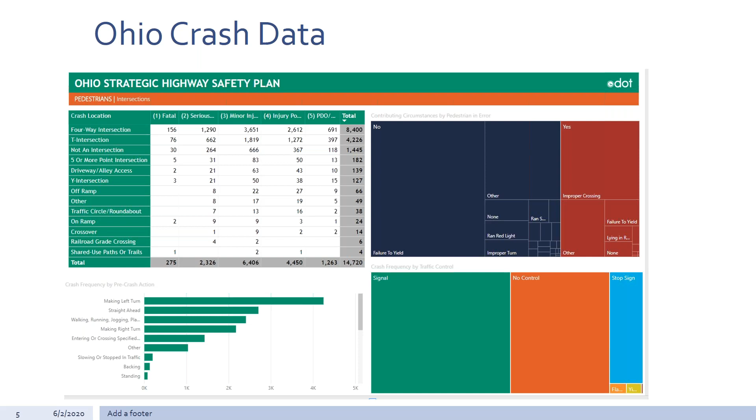You can see the different types of intersections - the traffic circle, the roundabout, as well as all-way stops, traffic signals, and so forth. This is a great way to visualize what is going on in your state as it relates to pedestrian safety and intersections, and what we're doing to improve that. Hopefully looking at proven safety countermeasures and deploying them not only as safety projects, but also as capital improvement projects, state-funded projects, and locally funded projects. I encourage you - I think I heard Victoria talk about opportunities related to the crash form and the importance of the information on crash forms, which helps us make better data-driven decisions about intersections and our roadways overall. This is a new way of looking at the data, at least for me in Ohio, and you guys are always ahead of the curve. I always like to see how Ohio is presenting the data and how you can use this information both for individual projects and for planning for the future in your communities.

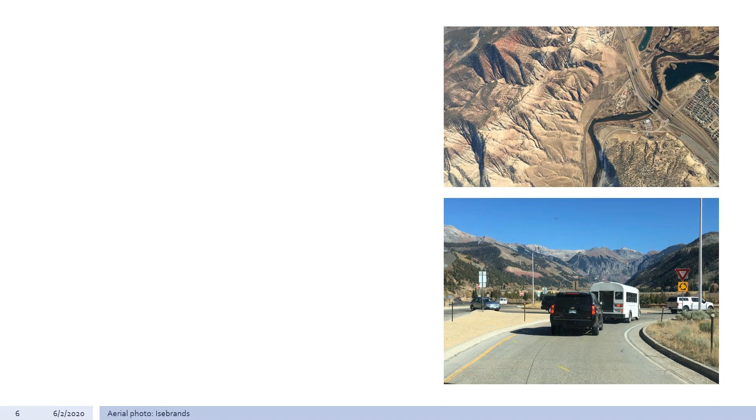I almost always have a few items I like to cover that are facts about roundabouts. It doesn't hurt to see them for the first time, the 10th time, or the 100th time, because it really is motivation for why we look to roundabouts as that solution. So I'm going to go through those - top 5 here.

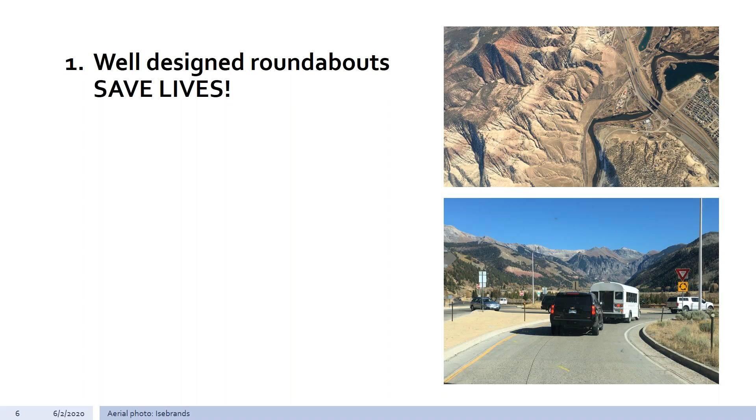Well-designed roundabouts save lives. We know that. The data tells us that in the US, the data tells us that around the world, the data tells us that in our communities. So we know this is an opportunity to improve safety in our communities, reduce fatal crashes, as well as reduce severe injury crashes.

Speeds between 15 and 25 miles per hour keep all users safe. That's kind of the sweet spot - it's a range, sometimes we see lower than 15, sometimes higher than 25. But the importance of what that speed means for all users is really, really important.

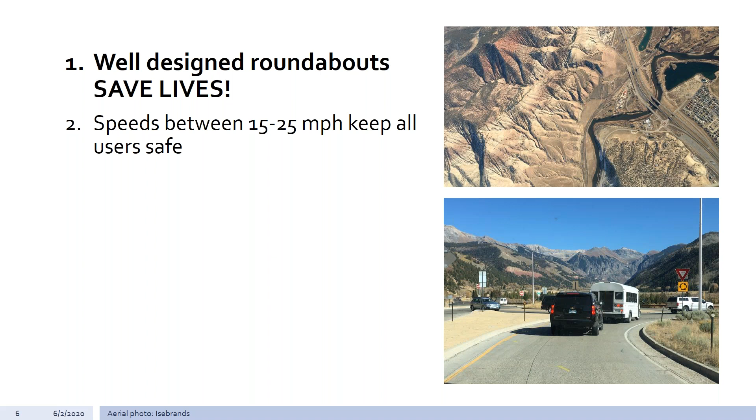One thing I always do when driving through a roundabout - whether it's in my own community or one I've driven for the first time - is check my speeds. I like to see whether it's an R1, R2, R3, R4, or R5. That's our speeds we're checking as we're doing our designs - the entry speed, the exiting speed, the circulating speed, the right turn speed, the left turn speed. Those are really important. I always smile when I'm between that 15 and 25 miles per hour. You can do this even on your commutes safely, checking your speeds as you navigate through roundabouts to see if it is in that sweet spot.

Hillary, I have a quick question for you. Yeah, sure - somebody would like to know if you could briefly explain the difference between a roundabout and a traffic circle. Sure thing, and maybe that came from that previous slide.

Traffic circles tend to be larger - typically anywhere between 300 feet in diameter upwards of 600 or 700 feet in diameter, so they can be very, very large. Traffic circles also don't always have yield on entry, while roundabouts always have yield on entry. If you think of DuPont Circle in the Washington D.C. area, there are actually traffic signals at many of the approaches to those large traffic circles, and sometimes there are parks in the middle of them - again, not a feature of a modern roundabout. Traffic circles also sometimes have larger speeds and weaving areas, which again is not a feature of a modern roundabout. I know in Ohio you have some larger traffic circles that are lower volume but tend to be very, very large, and sometimes there's stop control on entry versus yield control. That's the difference, and that's probably why in that data I just showed, you see both traffic circle and roundabout categorized together in that particular database.

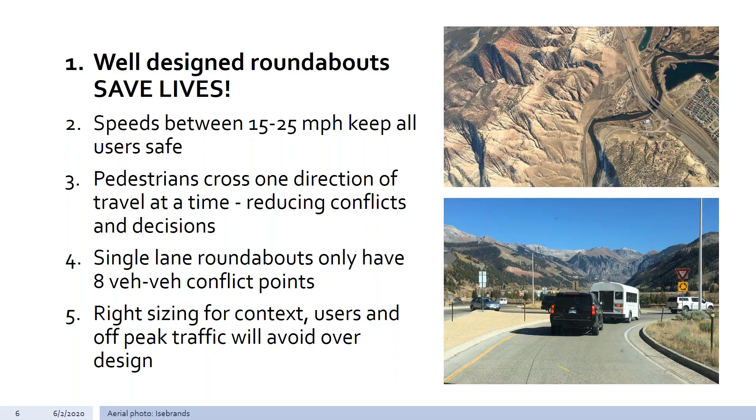So let's dive into roundabout guidance, okay?

Hopefully you are all familiar with NCHRP 672, which is getting outdated. Publication date was 2010, and here we are 10 years later. There have been dozens and dozens of other research projects, as well as updates to other documents in both traffic and design that are enhancing what is in NCHRP 672. I still refer to this document on a regular basis.

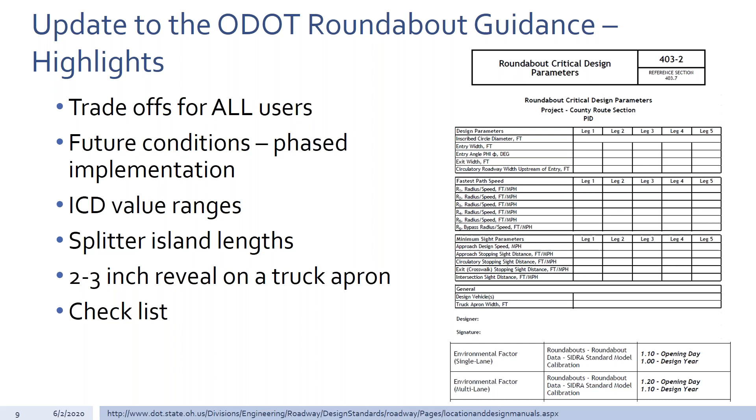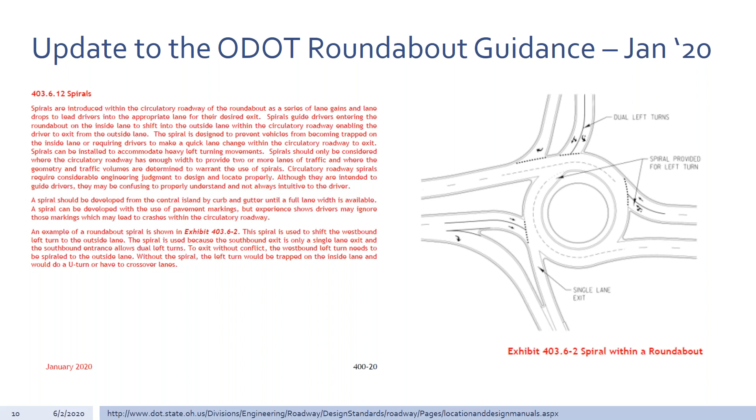So again, I really like the continuous improvement I see in the ODOT guidance. This is one of the states where I regularly check what you all have in the guidance as I work with people not only in Ohio but across the country. I pulled this one out just as an example of a major change that occurred in the roundabout section related to the spirals — you can see the image on the right as well as the text. I don't intend to go into great detail, but this was a major update that occurred in January 2020 of your roundabout guidance. So if you haven't grabbed the most recent document, I encourage you to do so.

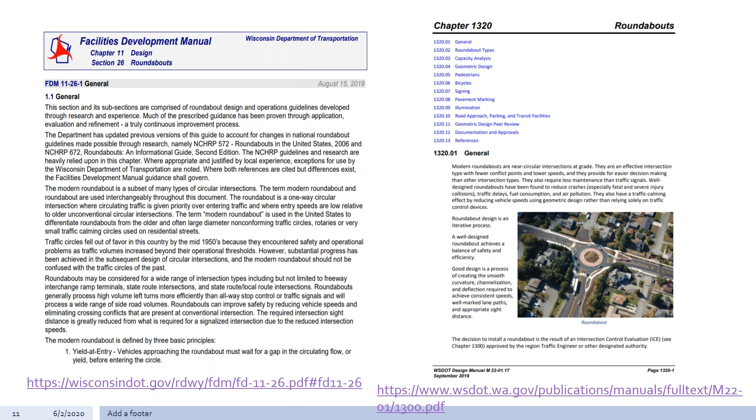This stuff is much more accessible to us these days. Perhaps there's something you're curious about or not quite sure how to design or handle there in Ohio. In addition to NCHRP 672, we have other states and local agencies with great information out there that we can be tracking, and it's very easily accessible. You guys are able to download a copy of this PDF for your use. I always try to put the links to where I'm getting my information so you can go directly back to that and dig in for yourselves. In this case, you've got not only design guidance, but also operational steps and recommendations for these particular states.

Now, I know that Arcadis there in Ohio, Brian Moore in particular, was involved in this project and has been involved in looking at some feasibility studies there in Ohio for particular projects.

To our knowledge, in the US, the first turbo roundabout that will be on the ground, and I haven't confirmed 100% if it is on the ground yet, would be in Jacksonville, Florida. They had a roundabout that's been vetted for quite some time now, and it was supposed to start construction at the end of 2019. I was unable to confirm that prior to our webinar today, so if any of you can confirm that it's completed, I'd love to hear in the chat pod. But again, this is just another variation of the roundabout, with some different benefits in terms of lower speeds, really trying to reduce some of the issues we tend to see on multi-lane roundabouts, with raised features, raised channelization on the approaches and within the circulatory roadway. So stay tuned on this. This has been talked about at your Ohio Roundabout Conference, the concept of a turbo roundabout, and now we have an informational primer here in the United States to help those looking deeper into this option for design.

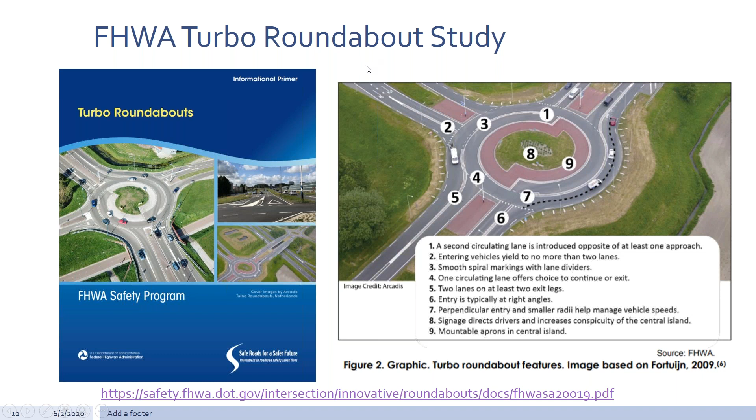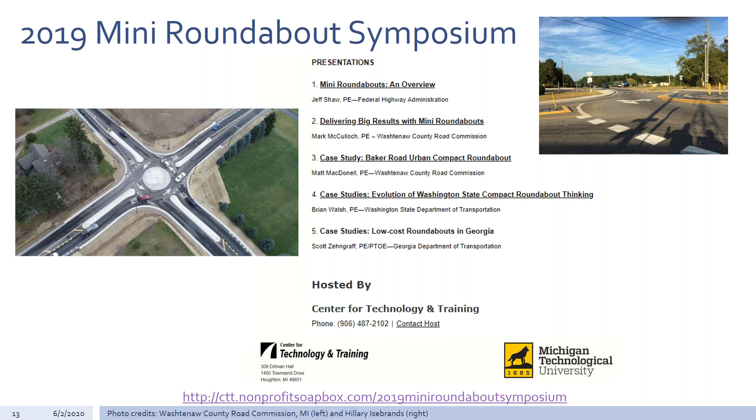So what roundabout projects are you mostly working on? Single lane, hybrid designs, multi-lane, mini roundabouts, a mix of all of them, or none? Just looking for what you're primarily working on, whether from an agency perspective or a designer perspective.

Okay, so right now a majority of you are working on single lane roundabouts, which is great. Single lanes are very common no matter where you are, whether it's a rural environment, suburban environment, or an urban environment. So great to see.

So about 14% of you are saying hybrid design, which would be a combination of 1 and 2 lanes, or 2 and 3 lanes. Not many working on multi-lane roundabouts, 2x2s. A few of you working on minis.

Again, you've got some great examples actually in the state of Ohio of mini roundabouts. We saw those in Newark last fall at the Roundabout Conference. And then of course, there's a significant number of you working on a combination of those, which I would expect for agencies or consultants working on multiple projects.

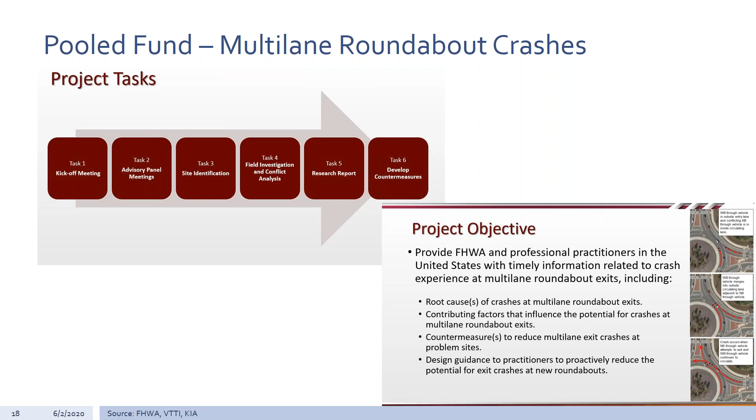Great, thank you, Hillary. Victoria, can everybody hear me? Yes, they can all hear you. Great, thank you. So thanks, Hillary, it's always good to hear everything that you have to say.

I just want to touch on a few things that we have going on here in Hilliard that might be of interest to the other folks in the state of Ohio. As Hillary mentioned, we're part of the pooled funds study. City of Hilliard was a contributor to that. We really wanted to be at the table to try to come up with some solutions to the 2x2 crash problem - if any of you have heard me speak at OTEC or anything like that, you know I'm pretty passionate about trying to come up with some solutions there.

The timing of this was actually really good because the data collection started in 2019, and we made some significant changes to our 2x2 roundabout in the summer of 2019. So the FHWA team was able to collect some data beforehand, both drone video data and counts, and could really see what was going on.

Last summer, we made some changes to signing and pavement marking to really clarify and simplify using overhead lane control signs, got rid of fish hooks, changed some key markings in the circulatory roadway, and some additional modified signage in our central islands. And so far, knock on wood, we've been pretty pleased with the results.

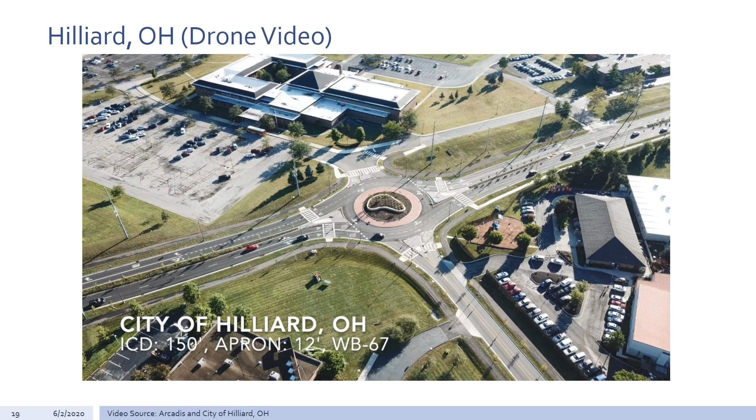You'll see here a multi-lane roundabout on the main line, single lane roundabout on the cross streets, ICD of 150 feet, 12-foot truck apron. Here we're going to see a through movement on the inside lane, and the truck's coming in, and you can see he overtracks just a little bit into the outside entry lane, uses a little bit of the truck apron, and then exits through there.

So he's using a little bit of a truck apron, and we're also going to see a through movement the other direction, but this time in the outside lane. As the truck comes through, you're going to see it track a little bit on the inside lane. The driver on the inside lane holds back. And not once did the truck ever go up on any of the curbs here, with the exception of the truck apron.

And especially here on a right turn. Again, this is WB67 going through 150 foot ICD on the multi-lane portion of this roundabout. So you can see them making the right turn here.

This is going to go by really quick, but you'll see that this is an auto turn simulation of a WB67, and it showed the truck tracking into the central island, making that left turn. And here's the actual truck. You can see the truck is only using a portion of the truck apron. So I thought that was just a really interesting observation, that auto turn showed it going into the central island. Here's this same truck doing a U-turn around the roundabout, and again, not going into the central island, even though auto turn truck turns showed that was going to happen.

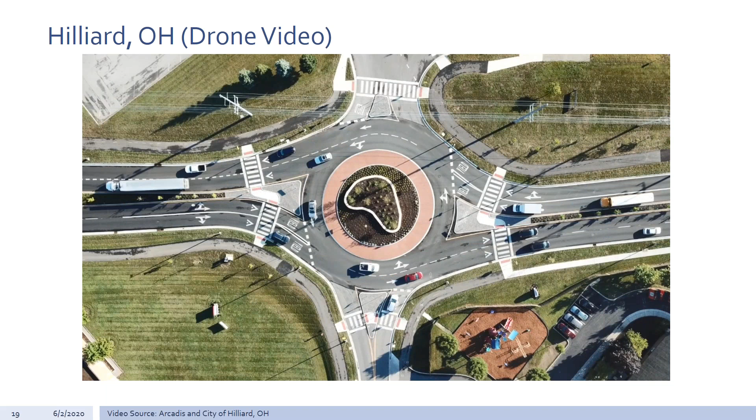So now we're going to move to another intersection here. This is a single lane that was designed more in a residential area, 120-foot ICD, a 6-foot apron, and the design vehicle here was actually a WB40. Again, this is the same truck, we've been using the WB67.

Making the right turn, and again did not go up onto the curbs. Here he is making the left turn.

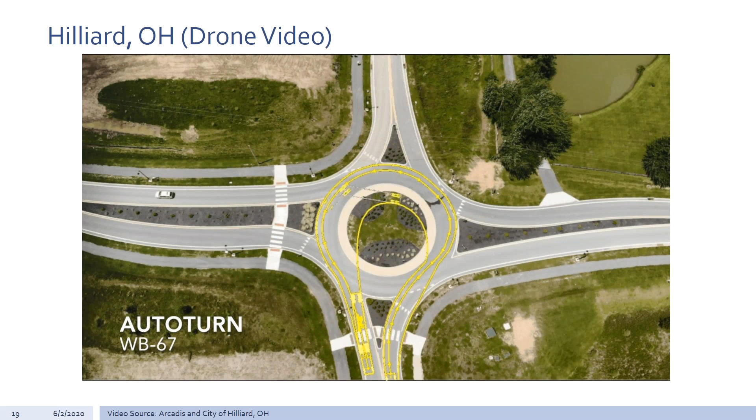You'll see that he does use the truck apron, uses the majority of it, but like the other cases, does not get up on the curb, stays in the truck apron. Then here's auto turn showing what a U-turn would look like, well into the central island. And here's our truck that's going to make that same U-turn movement, just pay attention to how he's using that truck apron. He'll be using the majority of it, but not getting into the central island.

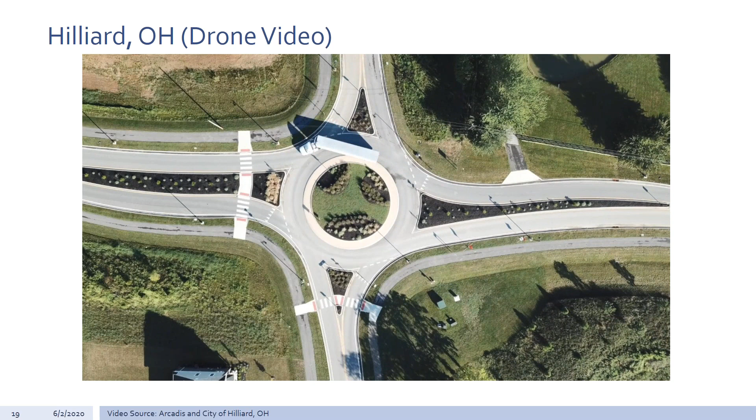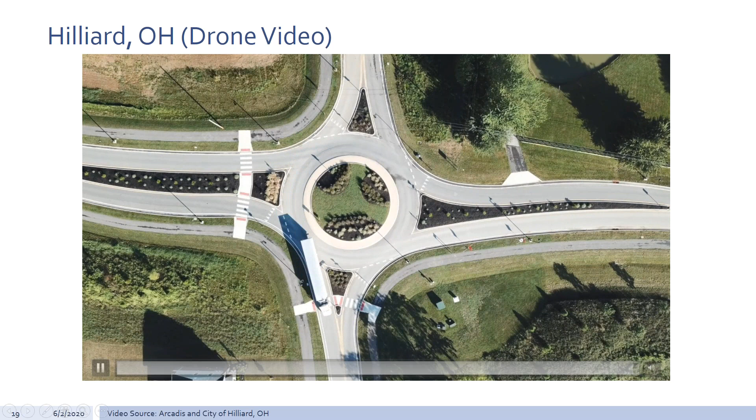So these were really just some observations that we made last summer. Just thought it was really interesting. We're designing these roundabouts and really being dictated by the design vehicle, using the tool of auto turn. I think it would be nice to see some additional research on this and some other locations and how those are tracking. I first noticed this a few years ago, just driving in the winter months, noticing there were no truck tires up on the truck aprons. So I kind of pay attention to that on a regular basis, and I notice these trucks just don't seem to be using the truck aprons like we thought they would. So that's all I have there. Letty, did you have anything else to add?

No, I don't think so. I think our gut reaction is, when we run these auto turn templates, if we had seen that much over tracking, especially off the truck apron, we would have immediately decided to make the roundabout larger. I guess I would say we should be questioning some of these assumptions, and maybe as a balancing act, you keep the roundabout smaller but increase the truck apron instead. So I would challenge all of us to really think about assumptions and not use a cookie cutter approach when designing the roundabout.

So that's all I had. I saw there was a question about the speed of the truck. That's something we didn't measure when we were out there, but if I had to guess, Letty, were you thinking maybe 10 miles an hour, or a little less? I would say 10. The truck driver was going pretty slowly. I'd have to say this truck driver was pretty skilled and experienced, and we all know not all truck drivers are that good. But I was impressed that even on the smaller roundabout, where the design vehicle was a WB40, he didn't even touch any of the curbs. That was pretty impressive.

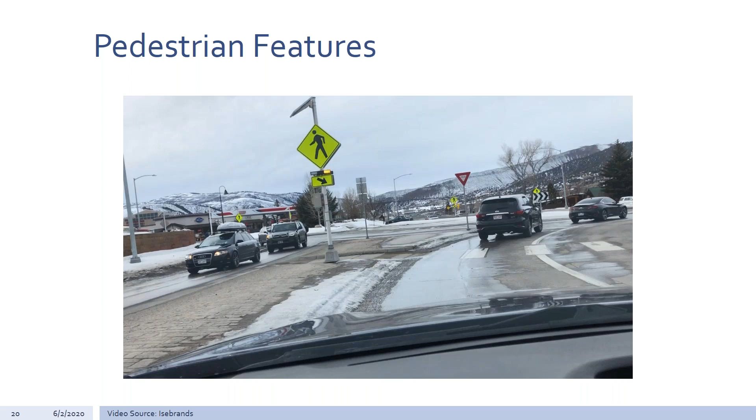All right, let's get to that poll question. I'm going to launch a poll question here. This will be the second one you're going to see. The question is, are you comfortable with discussing pedestrian safety at roundabouts? Yes, no, sort of, I don't know. This would be at a public meeting if someone asks you a question, and it could be general safety, or it could be accessibility as it relates to pedestrians crossing at a roundabout.

So it looks like about half of you have said that yes, you are comfortable with talking and discussing pedestrian safety at roundabouts. 6% of you are saying no, I'm not really comfortable, and actually 36% are saying sort of, and 9% saying I'm not sure, so I don't know. That is a good mix, I would say. I'm glad that a majority of you, and we do have a lot of people on this webinar today, are comfortable. That's great.

I would like to hear from you, and we'll get to some more Q&A in a moment. Where are you struggling with this? Where are you having a hard time, maybe stating the facts or tying it to a specific location? Would love to hear from you so we can have some of that as part of our discussion.

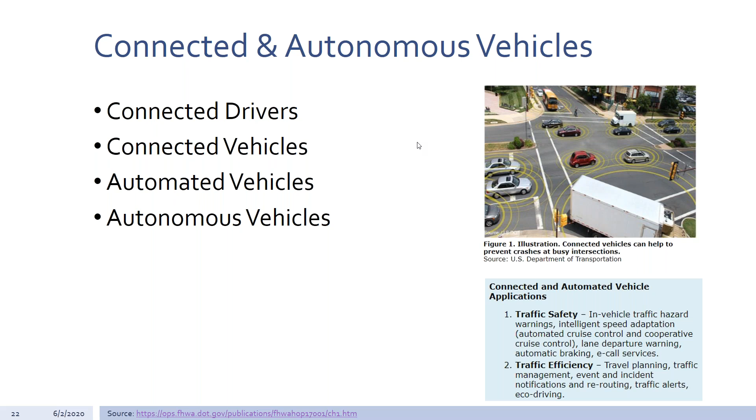And then the last topic that I want to cover here, just as hot topics, is the safe system approach. So the safe system approach is something that has been active internationally, in the Netherlands, Sweden, Australia, where really it's an approach to what we do to provide a safe network. Really, its core principles are looking and knowing that death and serious injury are unacceptable, no matter who we are or what agency we are, that those fatal crashes, those deaths and serious injuries are unacceptable.

We also have to acknowledge that humans make mistakes, and there are ways that we can use infrastructure to help correct some of the mistakes that people make. And it's working in combination with the human factors part, the education, the enforcement, the engineering. We all have to be working together if we really are going to have a safe system.

We have to acknowledge the fact that humans are vulnerable, and there's a limit to the amount of energy that we can withstand, whether that's being in a car crash and whether you're belted or unbelted, a pedestrian or bicyclist that perhaps is hit by a vehicle. We can only take so much before pure physics is not going to be on our side if speeds are high. The responsibility is shared across everyone. Redundancy is crucial in the system, and we need to be proactive, not reactive.

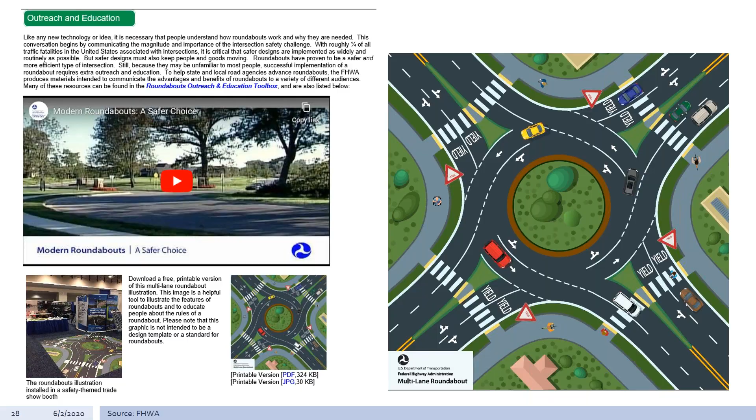The other thing I'll mention is there was an article on the 2019 National Roundabouts Week. I was with you all during National Roundabouts Week last September, and there was an amazing response, with many of you on this webinar contributing. I appreciate that. It was great to see all the wonderful things posted on the hashtag Roundabouts Week. I wanted to share that article in case you didn't see it. You'll notice Professor Roundabout was acknowledged, which is important given the contributions many of you in Ohio made to Roundabouts Week. I look forward to the next one.

Always a pleasure to be with you all at your statewide conference. Great host there from Newark last year. I wanted to make sure you all know that many, if not all, of the presentations are available through Ohio DOT and Ohio LTAP. There's also a nice news clip that came out, which was in the loop. Victoria, this would be a great time for you to mention what the plans are for the 2020 Ohio Roundabout Conference.

Absolutely. I'm not going to give up the ship here, as they say, but we are going to take the conference virtual, meaning we won't do it all in one day. We'll probably spread it out throughout National Roundabouts Week, which will give us the opportunity to celebrate all week long. I'm looking forward to getting the details out to everybody. I'm just putting the finishing touches on how we've reconfigured things so we can get the call for presenters out too. We're excited that we'll hopefully be able to engage others who might not have had the travel dollars to come into Ohio for the conference, so hopefully we can get a lot of engagement, not only within Ohio, but from without as well.